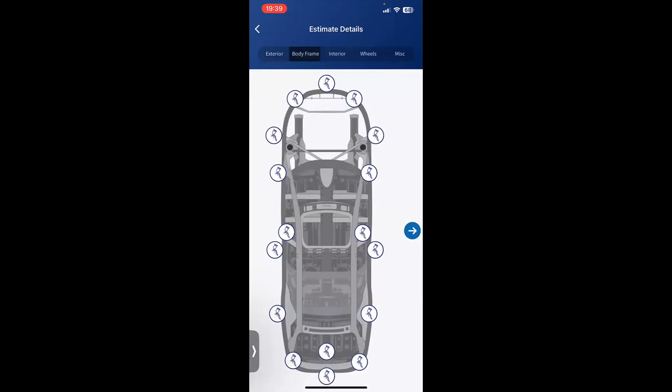So what you can see here is you've got different vehicle types, which give you different panel names. You can do all your inner repairs as well to your body frame, your chassis, rear panel, inner quarters, things like that. Then people that do like the interior sort of trims, steering wheels, dash repairs, leather seats. Then you've got your wheel refurbs here, and then you've got miscellaneous. So you've got all your bits and pieces here. It's literally point and shoot, very easy to use.

Now, the good thing about the app is you can set your paint and materials costs in the background, and then when you select from here, you can incorporate that into your assessment. So straight away, you are pricing to what the vehicle is. You're not, you know, giving one price, one size fits all kind of approach. If it's metallic, it's going to be obviously more than what a solid color costs. If it's three stage, again, it's going to be more than what a metallic costs. And then obviously you've got your Xirallic pearls as well.

We all know how much Xirallics cost, and this all needs to be incorporated into the app. And you uplift it in the background, percentage-wise, how much you want. So just say you've got a tinter, let's just say a metallic one that's costing you £100, and then you've got a pearlescent tinter, which costs you £120. You need to increase that in the background by 20%. It's nice and easy, nice and simple. But again, the app's going to work tailored to your business.

It's not going to tell you what paint and materials you should charge. This is tailored to your business. You need to work out the boring stuff. And then once you've done that once and you put those figures into the app, it's going to work for you all the time. And that's the good thing about the app, is everyone's price is different.

And like Tim said before, and he's got a calculator for it, your hourly rate is going to be different to everyone else's. Your paint and materials is going to be different to everyone else's, considering the scheme you've got, things like that. That's why it's so important for you to work out what a panel costs you as a business. And then just say, for example, you work out your monthlies of your paint and materials, and then you divide that by the amount of panels you do.

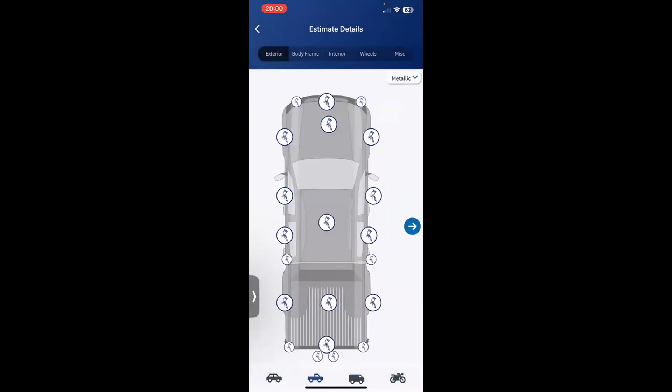You've covered yourself. If you go back a week, a month, a year, it's going to be here on the app ready for you to review it. You're protecting yourself. It's everything that you need in one app, essentially. Did you say that you could turn that into a job card as well? Yeah. So let me try and find a job that's actually got good data on it, so you can add technician notes.

You've got a couple of boys working for you. You can say check for damage behind front bumper, or customer said the fog light wasn't working. Anything that you feel like you guys should know, you can put that there. And there you go. You got your remove and refit hours, your repair hours, prep, paint, jig, pull in, anything like that. Left front wing, poor previous repair notice, and then you got all your times on there with all your other charges.

And you can share that. You can share that to anyone really via WhatsApp. If you're in the office and you want to share it to one of the guys, get this one in next. It's got the reg on it. It's got the make, model, and they'll go grab it for you and work on it.

How much does it cost, Tom? It's £9.99 a month plus VAT, so it works out £11.99 a month for a single user, and then if you want 3 users, it's 25. But if you think about it, it's less than sort of 40p a day, and the amount of time this would save you just alone, let alone you working out in profit, the amount of more money you'll make from doing systematic, consistent estimates.

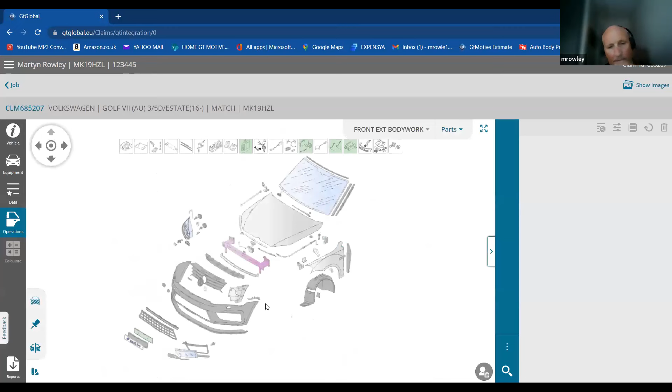Come back to here, so click on the bonnet, it gets exposed, and I now want to say renew the bonnet, goes blue, and out here if we click the ABC, I'm going to go for replace. That adds that operation for replace. Do you want a mounting kit for that? So here we've got the part number from Volkswagen and the price for the mounting kit. We've got the replace bonnet, which is the part number for the bonnet, the price of that bonnet.

Although it looks 0.4 of an hour, that's just for the replace of the bonnet, not including the remove and refit. And this is the paint materials for that bonnet, and it's 2.2 hours. If you calculate the job just on that bonnet now, £1,589.95 for the job. The bonnet price, the mounting kit price, we've got remove and refit bonnet.

We need to add the replace bonnet, which is farther down, and the adjustment, which includes adjustment and the remove and refit. So I've got 0.6 and 0.4 mechanical and panel. So we've got an hour to take that old bonnet off and put the new one on once it's been painted. We get into paint labour, 2.2 hours to paint it, plus your preparation paint work, which is 1.1, and that's broken down by 0.5 for the main panel, colour mixing 0.3, colour sampling 0.3, and your materials are down here.

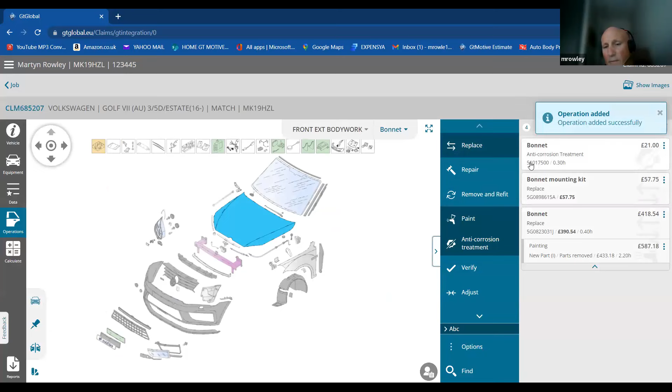So we're not finished there. I'm still on that bonnet. As Tom mentioned to you, there's things that you need to keep an eye out for. So anti-corrosion treatment. That's the official Volkswagen code, and you get 0.3 of an hour for applying that. I will go back to my data here, click on my parts, anti-corrosion material, I charge at £12 a panel.

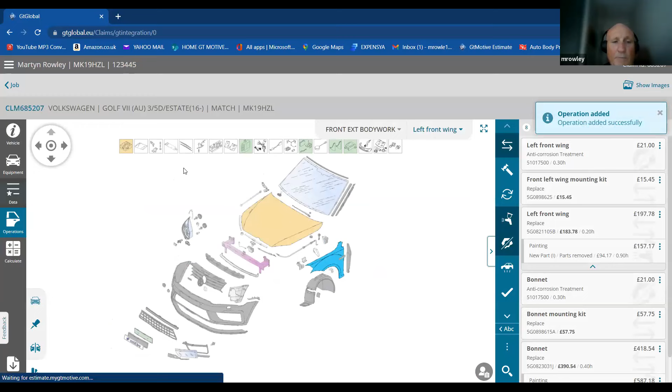I'm going to come to the wing now, click the left front wing, put that down for replace. Again, keep the mounting kit on there. And again, I'm going to put anti-corrosion materials on there. That gives me another 0.3. Go back to my data on parts. I'm now at £24.

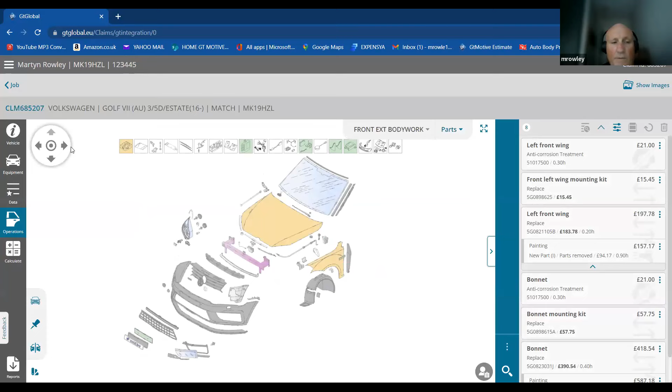I'm now going to move along the vehicle to the door. Click the door, and I'm going to this time repair it. So hit the spanner. I'm going to put 3 hours labour down. The system automatically defaults, and as Tom said to you, the preparation area or the repaired area, I'm saying on this one it's greater than 50%, so that will increase your paint materials in terms of painting or priming the whole door, so it increases paint materials and labour time.

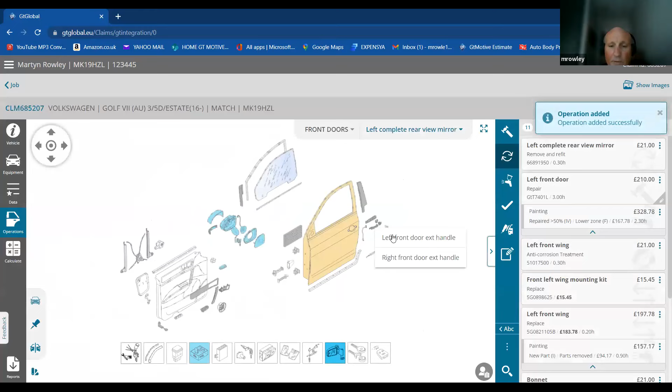And I'm going to repair from the top of the door to the bottom of the door. So we've got a graph here, so I'm going to use zone F. That's everything below the frame. And I'm now going to do all my remove and refits. So I'm going to go left rear mirror, remove and refit, door handle, remove and refit, and I'm going to surface paint and blend. It's a light metallic, so I want to surface paint and blend.

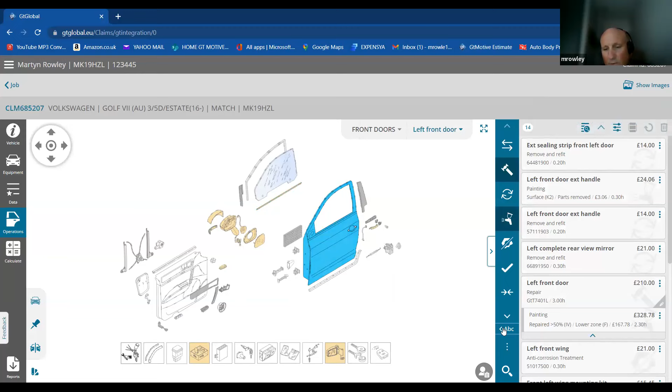I'm going to do the front strip, and then my panel beater comes in and says, hold on a second, I was messing around with that door a little bit more, I had to adjust the hinges, so let's go back to the door. If we look here, we've got an adjust button, so click the adjust button. That gives you again an official time of 0.3 of an hour for the adjust.

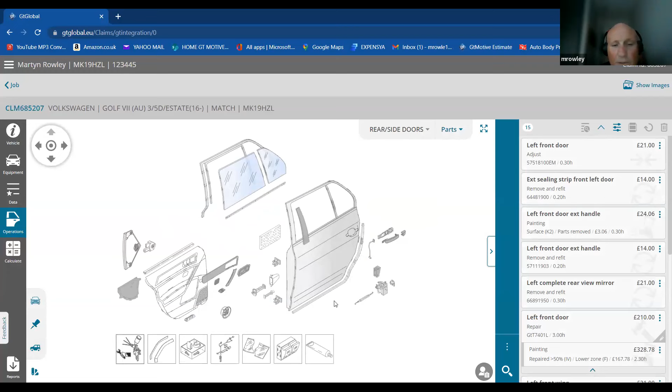And move along to the back door. And as you can see, every time I hover over something, it's left and right, if it's handed. If you do get confused and you just want to see the one side of the vehicle, I'm only using left. Down here, we can have a lateral lock. So I'm going to go for left only, and now you only see left. So I'll click that door.

On this one now, I'm going to go paint, surface paint and blend. And I'm going to do the door handle, remove and refit. I don't think I'm going to get away with the surface paint and blend on the back door, but hey ho. And on it, remove and refit.

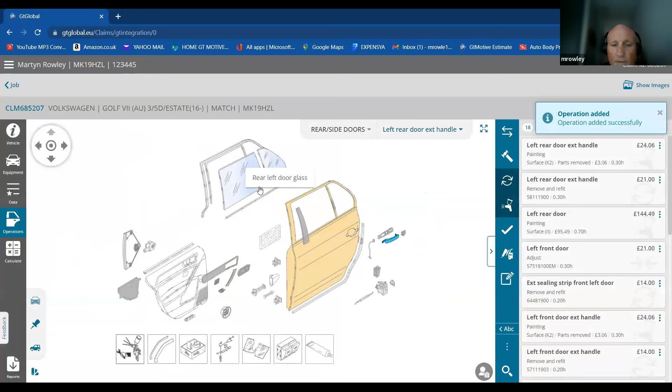Once I've done that, as Tom mentioned earlier, there's things you need to make sure that you're charging for, and we call them user operations, with this little person down here. I've got all my user operations set up by groups, so I can look at strip and fit, retail customer, etc. Or I can search in here, so I'm going to go technical data and methods. Even if you're not BS 10125, you should still be having to research those methods. So I'll be charging for it.

I'll go for a QC check. I'm going for a car care kit. I'm going for a pre-sweep. Diagnostics, I'm going to go for a post-sweep. I'm going for sanitisation. Tom, you need to change it because insurers will not accept COVID at the moment. They're cancelling it with everyone. So I'm going to go for PPE. And I'm going to go for surge, energy surge charge.

And on that bonnet, I'm going to go for beads. So I haven't got bonnet bead sealer in there, so I can make it. So, bead sealer. If you're using Tiger Seal, it might be TIG. You can put the part number for the Tiger Seal, and you can put, can't spell, like a bead sealer, and it's a replace, and the price I'm going to say £34.69 a tube. Labour time to do that is 0.5, and I'm going to do that on the paint section.